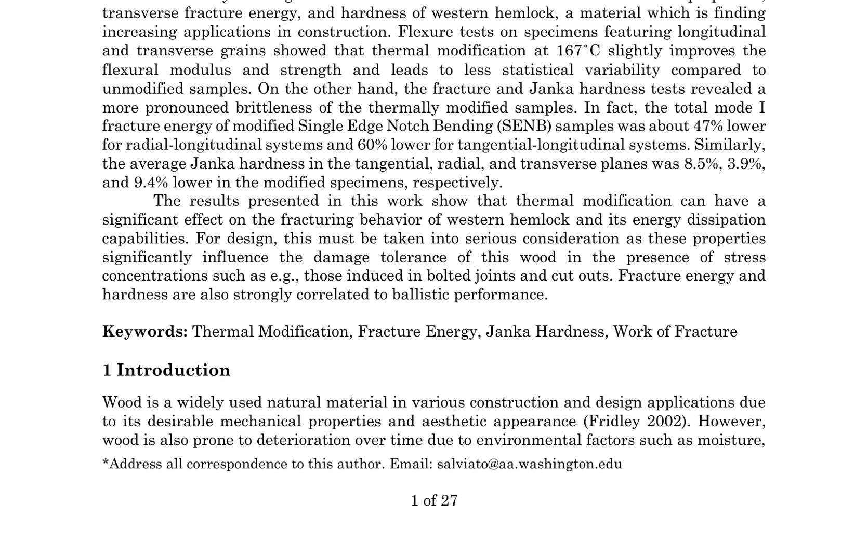Thermal modification of wood, a process that subjects wood to high temperatures in the absence of oxygen, has emerged as a promising method for enhancing wood durability and resistance to decay.

This treatment alters the chemical and physical structure of wood, leading to improvements in properties such as dimensional stability and microbial resistance. Research has extensively investigated the effects of thermal modification on wood mechanical properties, yielding varied results depending on factors like wood species, temperature, and duration of treatment.

For instance, thermally modified beech wood exhibits increased dimensional stability, hardness, and decay resistance, while thermally modified spruce wood shows improved dimensional stability and resistance to fungal decay.

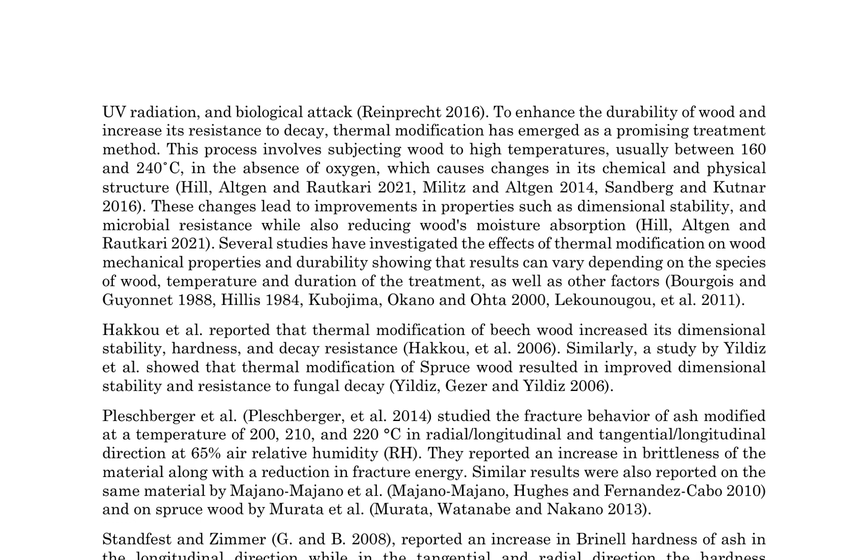Studies have also examined the fracture behavior of thermally modified ash, revealing an increase in brittleness and a reduction in fracture energy. Similarly, investigations on ash and spruce wood have observed increased Brinell hardness in the longitudinal direction, although some studies have reported a decrease in hardness in all principal anatomical directions after heat treatment at 200 degrees Celsius.

Moreover, thermal treatment has been found to maintain the intrinsic anisotropy of wood mechanical properties, leading to improved strength and elasticity in wet wood compared to untreated and treated samples.

However, significant decreases in modulus of elasticity, modulus of rupture, compression strength parallel to the grain, and Brinell hardness have been observed in certain wood species, such as Mozambican Brachystegia spiciformis and Julbernardia globiflora.

Heat treatment has also been applied to softwoods, including radiata pine, Scots pine, and Norway spruce, resulting in a large decrease in tensile strength parallel to the grain, an increase in compressive strength parallel to the fibers, and a significant reduction in impact strength.

These findings collectively highlight the complex effects of thermal modification on wood mechanical properties, emphasizing the need for further research to fully understand its implications.

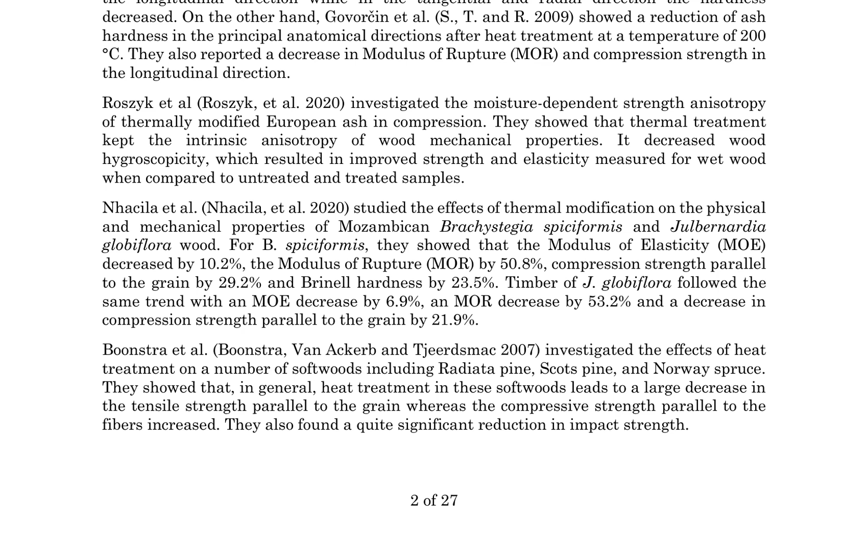The thermal modification of Western hemlock has received limited attention, particularly regarding its fracture energy and hardness, which are crucial indicators of its damage tolerance and ballistic performance.

A recent study by Nourian and Avramidis, 2021, examined the effects of commercial thermal modification on Western hemlock, assessing properties such as basic density, hygroscopicity, water absorption, anti-swelling efficiency, color change, Janka hardness, and dynamic modulus of elasticity.

Although their results showed decreased basic density, hygroscopicity, and water absorption, as well as increased dimensional stability, thermal treatment had no significant effect on mechanical behavior.

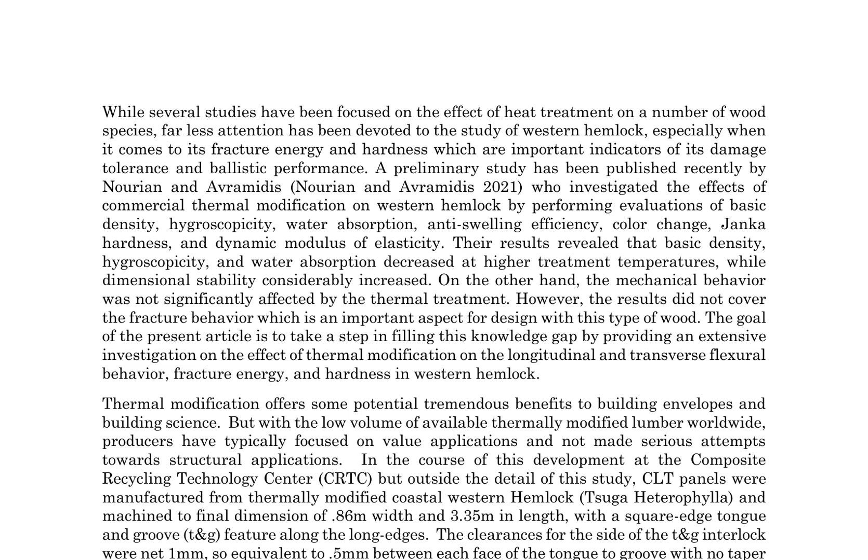Notably, this study did not investigate fracture behavior, a critical aspect for design with this type of wood. This knowledge gap is addressed in the present study, which provides an in-depth investigation of the impact of thermal modification on longitudinal and transverse flexural behavior, fracture energy, and hardness in Western hemlock.

The study's findings aim to overcome the limited volume availability of thermally modified Western hemlock, which has restricted its application to value-added products rather than structural applications.

A recent development at the Composite Recycling Technology Center demonstrated the feasibility of thermally modified Western hemlock in building science applications. CLT panels were manufactured from thermally modified coastal Western hemlock and machined to precise dimensions.

Following indoor storage for 6 to 9 months, the panels exhibited dimensional stability, allowing for precise assembly without interference or coercion. This capability enables a tight and durable building envelope seal, as well as a consistent glue line thickness and higher performance assembly.

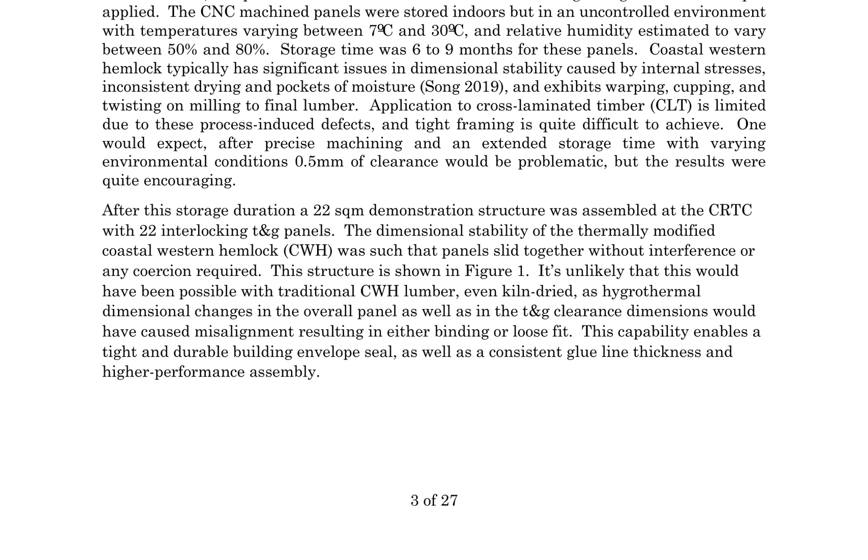The successful demonstration is depicted in Figure 1, showing the assembled 22 square meter demonstration structure at the CRTC. This research focuses on the mechanical behavior of thermally modified Western coastal hemlock (CWH) and its implications for structural design standards and computational models.

The study presents a demonstration structure featuring thermally modified CWH cross-laminated timber (CLT) panels with a tight 1 mm clearance between the side faces of the tongue and groove (T&G) joint to ensure precise panel alignment.

The findings provide useful design guidelines for accounting for the effects of thermal modification on the mechanical behavior of CWH and contribute to the development of rich databases for calibrating and validating computational design tools.

The research seeks to integrate thermally modified, undervalued US-based wood species into structural design standards and computational models, focusing on Western coastal hemlock. Advances in understanding the mechanical behavior of thermally modified wood would positively impact its use in mass timber elements like CLT. The study's findings are expected to provide a reference for incorporating thermally modified wood into structural design standards and computational models.

The materials used in this study were acquired from a small harvest of coastal Western hemlock from the Makah Reservation in Washington state. The forest is designated as a Site Class 3, low elevation, and moderate climate. The sample material was prepared according to specific guidelines, with details on the preparation process provided in the subsequent sections.

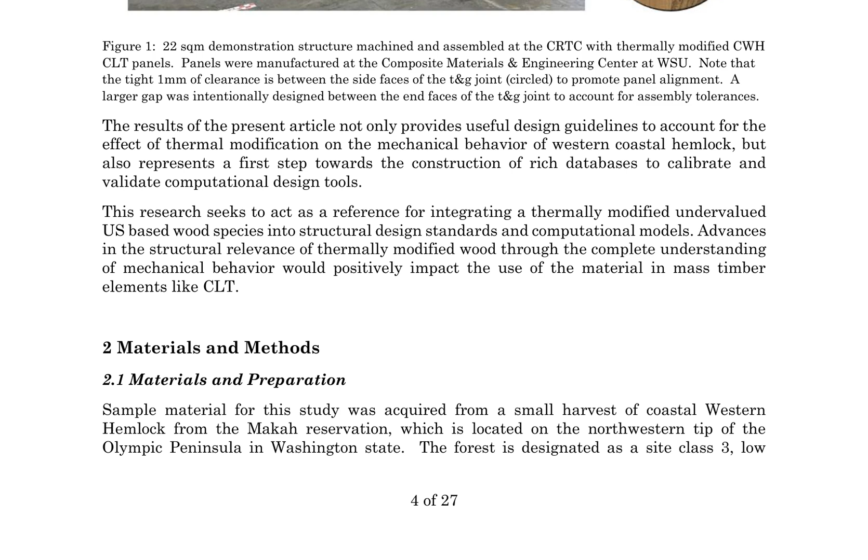The study's focus on Western coastal hemlock is significant, as this species is undervalued and underutilized in the U.S. By investigating its mechanical behavior and developing design guidelines, this research aims to promote the use of thermally modified CWH in structural applications, contributing to a more sustainable and efficient use of forest resources.

A 55.88 cm diameter, 396 cm log of Western hemlock was obtained from a commercial timber harvest program in the Pacific Northwest region, characterized by a climate with significant winter rainfall and a mean annual precipitation of 203.2 to 304.8 cm. To meet testing needs, the log was milled into various board sizes using a Weyerhaeuser mobile sawmill.

For longitudinal and transverse bending specimens, as well as single-edge notch bend (SENB) specimens, 23.175 x 40.64 x 396 cm boards were cut tangentially from the middle section of the log's radius. A 6.35 x 18 x 396 cm board was also cut near the pith for Janka hardness samples.

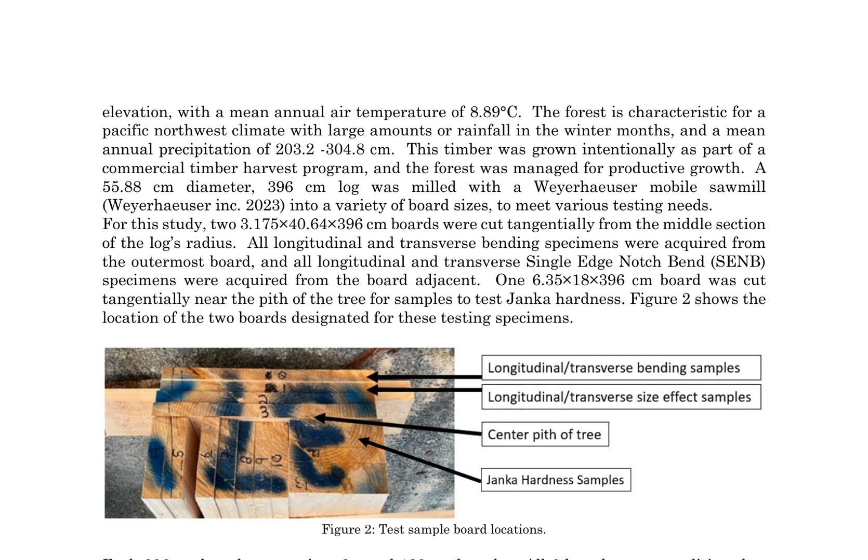Each 396 cm board was divided into 3 equal 132 cm lengths and conditioned at approximately 21.11 degrees Celsius and 65% relative humidity for 2 weeks.

Subsequently, the boards underwent an accelerated drying regime in a Wisconsin oven for up to 4 days, with temperatures not exceeding 48.89 degrees Celsius. Daily moisture content measurements were taken on a freshly planed surface with an Orion 930 moisture meter, and boards were removed from the drying regime when their moisture content dropped below 13%.

Minimal cracking and shrinkage effects were observed, allowing for the production of straight, crack-free samples. The boards were then split into 2 groups: unmodified samples, which remained at ambient conditions, and thermally modified (TM) samples, which underwent a standard production cycle at Therma Wood Technologies.

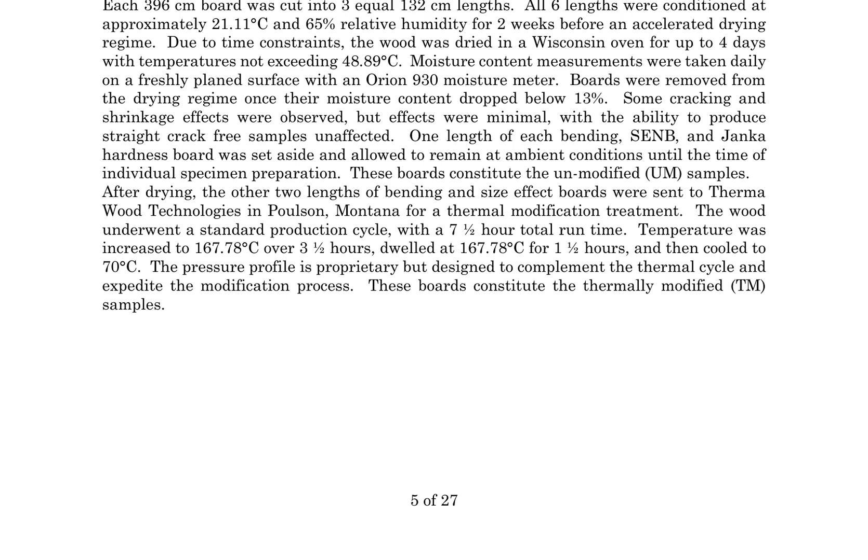The thermal modification treatment involved a 7.5 hour total run time, with a temperature increase to 167.78 degrees Celsius over 3.5 hours, a 1.5 hour dwell at 167.78 degrees Celsius, and subsequent cooling to 70 degrees Celsius. A proprietary pressure profile complemented the thermal cycle to expedite the modification process.

This section of the research paper delves into the preparation of specimens for various tests, including longitudinal and transverse bending specimens, as well as single-edge notch bending (SENB) specimens.

The preparation process began with planing boards down to a thickness of 25 mm using a grizzly planer, followed by ripping them on a SawStop table saw to create 25 x 25 x 410 mm longitudinal specimens parallel to the grain. These samples were then run back through the planer at 25 mm to reduce dimensional variability from the table saw before being cut to length on a DeWalt miter saw.

Transverse specimens were also prepared by ripping them perpendicular to the grain, spanning the entire width of the board. A total of 25 specimens were produced for each grain orientation.

The paper also presents the grain structure of both untreated and thermally modified (TM) wood in longitudinal bending specimens, as shown in Figure 3, with the loading direction down from the top of the image. This figure highlights the differences in grain structure between untreated and TM wood, which could potentially impact their mechanical properties and behavior under various loading conditions.

In addition to bending specimens, the paper describes the preparation of SENB specimens for fracture testing. These specimens were prepared in a similar fashion to bending specimens, with precise dimensions achieved using the planer whenever possible. The use of SENB specimens allows researchers to investigate the fracture behavior of the wood under different grain orientations and loading conditions, providing valuable insights into its mechanical properties and potential applications.

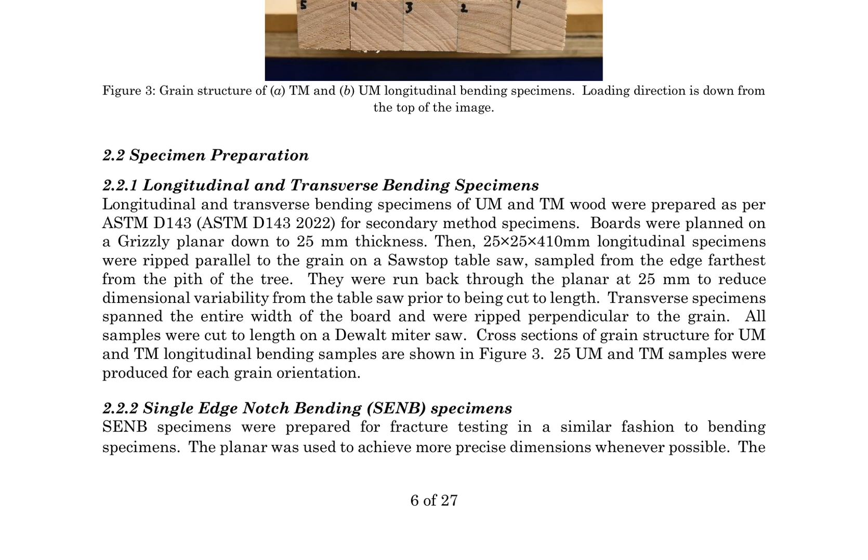This study examines the fracture behavior of wood samples using the single-edge notch bending (SENB) test, focusing on the radial-longitudinal (RL) and tangential-longitudinal (TL) configurations.

To create a finite width edge notch, a small kerf blade hand saw was employed, ensuring the crack tip radius is smaller than Irwin's characteristic length to avoid affecting fracture behavior.

The SENB test configurations, illustrated in Figure 4, comprise the RL system, where the crack propagates parallel to the grain in plane LT, and the TL system, where the crack propagates parallel to the grain in plane RL.

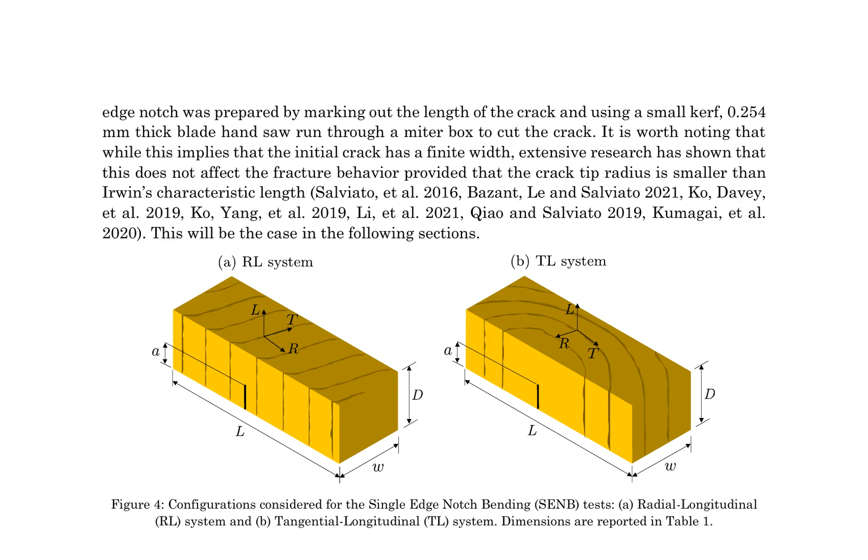The dimensions of the SENB specimens for both configurations are presented in Table 1, with 2 sizes tested for the RL system and 1 size for the TL system. 8 samples were produced for each size and configuration to ensure reliable results.

Previous research on spruce woods has shown that the RL system typically exhibits larger fracture energies and fracture process zones (FPZs) compared to the TL system.

To account for potential size effects, 2 sizes of the RL system were tested, as this system is more prone to size effects, allowing for the measurement of size-independent fracture energy and ensuring the FPZ is fully developed.

The testing of both configurations is necessary due to differences in mesostructure in front of the crack tip, resulting in disparate fracture energies. By investigating both configurations, this study aims to provide a comprehensive understanding of the fracture behavior of wood samples, encompassing the effects of configuration and size on fracture energy and FPZ.

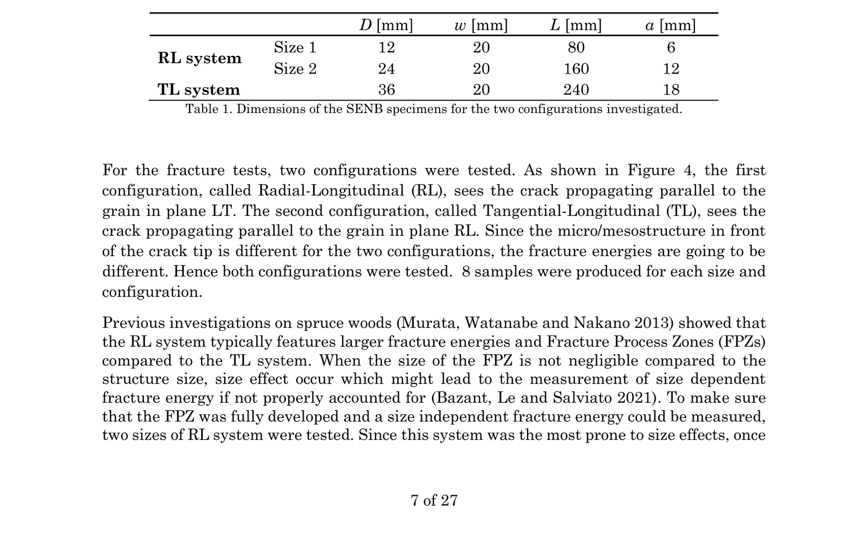The experimental setup and methodology employed in this investigation involved testing a single size of the TL system, as the measured fracture energy was found to be unaffected by size.

A comprehensive summary of all specimen sizes is presented in Table 1, with a schematic representation of the configurations examined in Figure 4. Dimension and weight measurements were obtained, and samples were speckled for digital image correlation analysis.

For Janka hardness testing, 20 specimens each of untreated and TM wood were prepared from the same log, with dimensions of 50.8 x 50.8 x 27 mm.

Figure 5 displays the specimens, illustrating similar annual growth ring patterns and exhibiting 7-8 rings with distinct earlywood and latewood bands. Prior to testing, the densities of the specimens were obtained at equilibrium moisture content (EMC), with average moisture content values of 12.5% for untreated wood and 9% for TM wood.

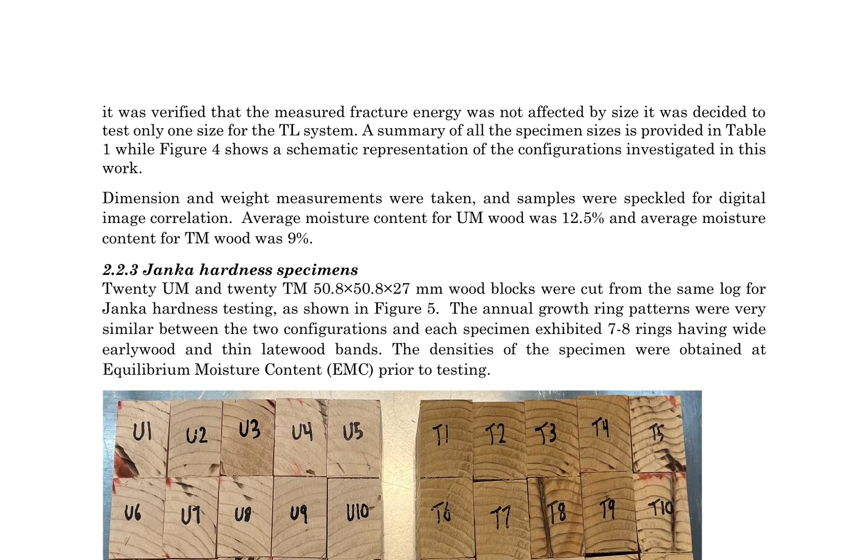Flexure and single-edge notch bending (SENB) tests were performed on a Test Resources 316 series UTM, utilizing a 22 kN load cell with a 10 Hz sampling rate. The typical test setup is shown in Figure 6. A displacement rate of 5.08 mm per minute was employed during testing.

Digital image correlation (DIC) analysis was facilitated through a thin coat of spray paint primer and a fine random distribution of black speckles. Images were captured with a Nikon D5600 DSLR camera and Nikon lens, with a sampling rate of 1 Hz. DIC analysis enabled the characterization of the whole strain field and strain redistributions at damage locations, as well as the estimation of the compliance of the fixture and the machine.

This experimental setup allowed for a thorough investigation of the mechanical properties of untreated and TM wood specimens.

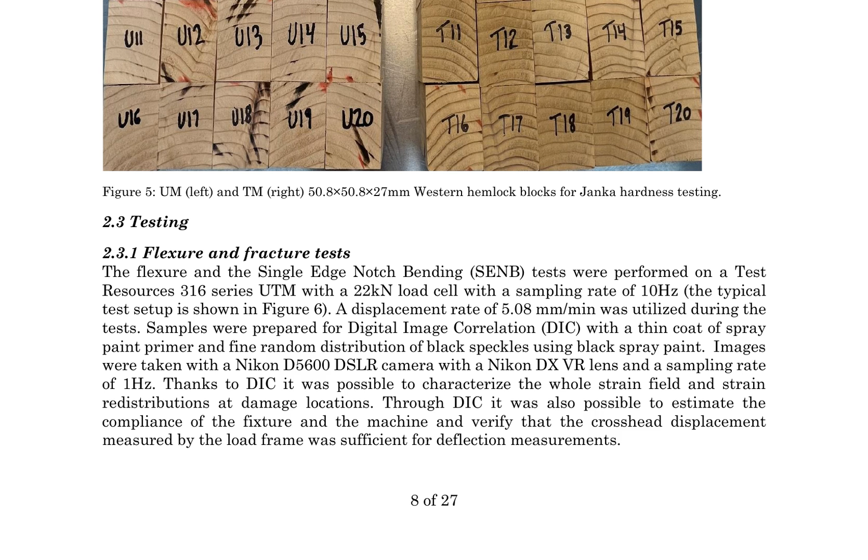The combination of Janka hardness testing and flexure SENB tests, coupled with DIC analysis, provided a comprehensive understanding of the specimen's behavior under various loading conditions. The experimental results are expected to shed light on the differences between untreated and TM wood, ultimately contributing to the development of novel engineered wood products.

The experimental setup for evaluating the material's resistance to crack growth and propagation, as well as its flexural properties, involved single-edge notched bend (SENB), and longitudinal, transverse bending tests. Figure 6 illustrates the test configurations, utilizing 10 mm and 30 mm rollers for SENB and bending tests, respectively.

Scanning electron microscopy (SEM) imaging was performed on radial-longitudinal (RL) and tangential-longitudinal (TL) specimens from each configuration to examine the fracture surface morphology. A Phantom Pro X SEM was employed, operating at 15 kV and 60 pascals. To ensure accurate imaging, razor-cut sections of the fractured surface were prepared, and images were captured 5-15 mm away from the crack tip and at least 1 mm away from the edges to avoid damage from sample preparation.

Complementing the fracture tests, Janka hardness tests were conducted using a custom-machined indenter conforming to ASTM D143 standards. The indenter design and fixture setup are depicted in Figures 7 and 8. The indenter was attached to a United SFM 300kN electromechanical series universal testing machine to collect data.

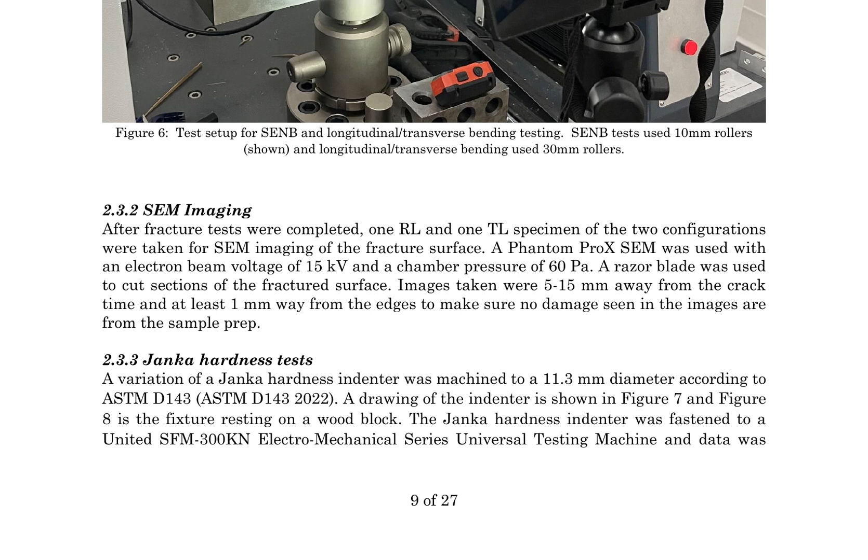The experiment measures the Janka hardness of wood specimens using a custom-built fixture and United Datum 5i software. Specimens are loaded at 6.35 mm per minute to a maximum penetration depth of 5.65 mm, which is half the diameter of the fixture.

For each of the 40 specimens, 6 hardness values are obtained from 3 orthogonal faces: 2 from the tangential face, 2 from the radial face, and 2 from the transverse face or cross-section of the wood. Average values are calculated for each face of each sample and ultimately for each face of the 2 configurations.

The Janka hardness indenter, shown in Figure 7, is a machined component designed to penetrate the wood specimen. Figure 8 illustrates the indenter in action, sitting on top of the specimen, demonstrating the experimental setup.

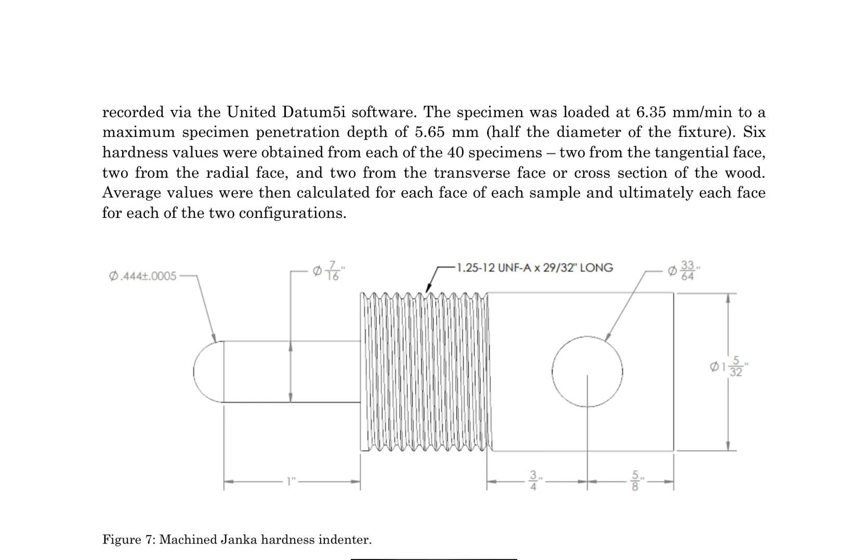The Janka hardness test is a standardized method for evaluating the hardness of wood, a crucial property in determining its suitability for various applications. The experiment's design allows for the collection of comprehensive data on the Janka hardness of the wood specimens, taking into account the variability in hardness across different faces and configurations.

By leveraging the United Datum 5i software, researchers can accurately record and analyze the data, providing a robust understanding of the wood's mechanical properties. The experimental protocol ensures that the results are reliable and reproducible, which is essential for drawing meaningful conclusions about the Janka hardness of the wood specimens.

The data collected from this experiment will be crucial in informing the development of predictive models and understanding the relationships between wood properties and their corresponding hardness values.

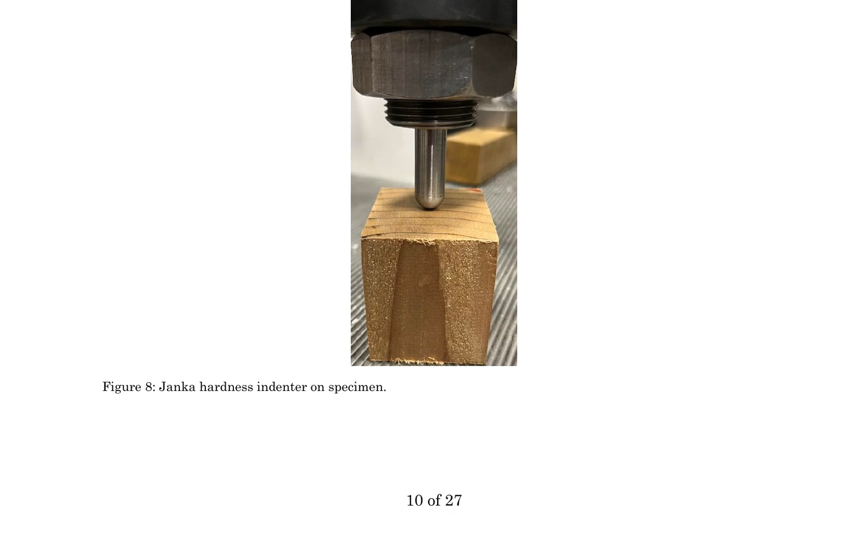Longitudinal and transverse bending tests were conducted to investigate the failure modes and mechanical properties of unmodified and thermally modified wood samples. The longitudinal bending samples exhibited various tensile failures, including simple and splintering tension, as well as cross-grain failures, in accordance with the ASTM D143 standard.

In contrast, the thermally modified longitudinal bending samples failed in a similar manner but with notable differences in failure behavior, characterized by quicker, more brittle behavior, with less crushing at the loading head and less deformation prior to ultimate failure. The fracture surfaces of the longitudinal flexure specimens, shown in Figure 9, illustrate typical fracture paths that follow the grain of the specimen.

In contrast, transverse bending samples exhibited brittle, fragile failures, with sudden and complete cleavage through the cross-section. The fracture surface was smooth, running along the grain, with no visible or audible cracking prior to ultimate failure.

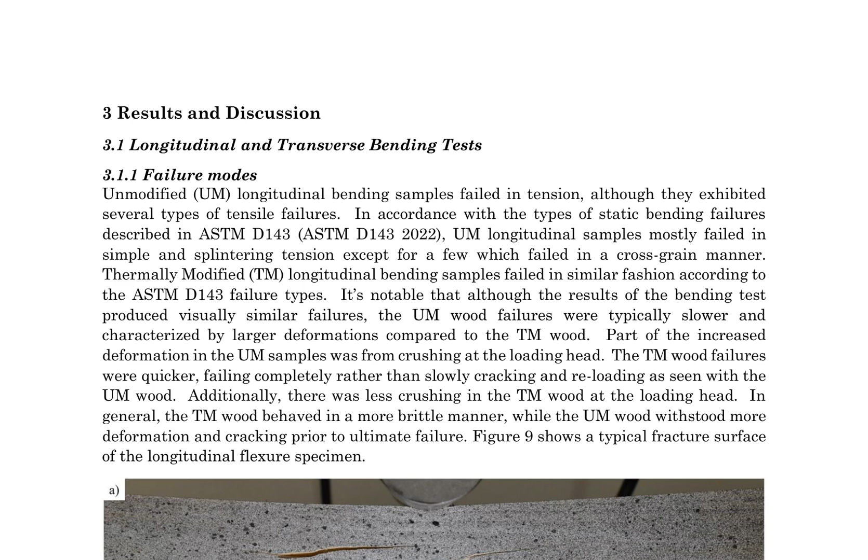Mechanical properties were evaluated through the calculation of modulus of rupture values, based on the maximum load measured in the tests. Bending strain and modulus of elasticity were calculated based on crosshead displacement of the load frame during the elastic response of the wood prior to any crushing or non-elastic behavior.

The results, presented in Table 2, show that the modified wood yielded 7% higher values compared to the unmodified wood, as illustrated in Figure 10a. The coefficient of variation (COV) values are also presented in Table 2.

The results suggest that thermal modification affects the mechanical properties of wood, particularly in terms of brittleness and deformation behavior. Thermally modified wood exhibits more brittle behavior, with quicker failures and less deformation prior to ultimate failure, whereas unmodified wood withstood more deformation and cracking prior to failure.

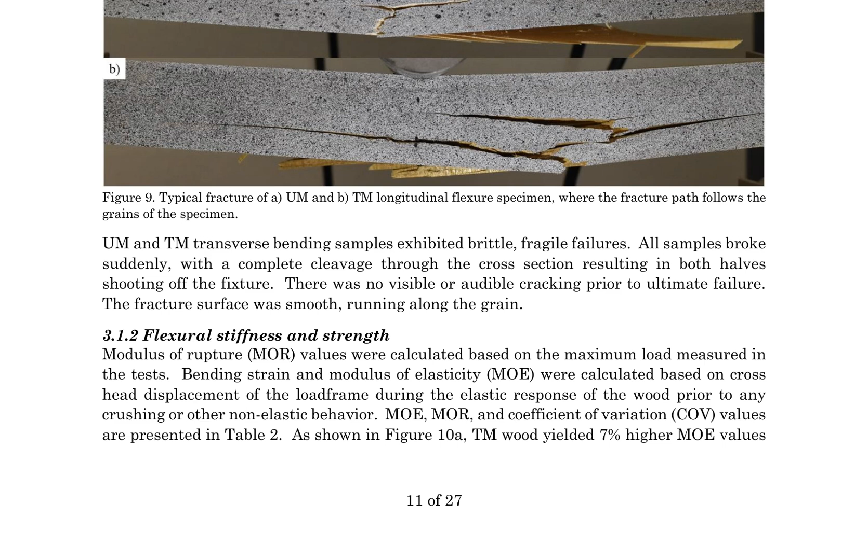These findings are consistent with visual observations of fracture surfaces and mechanical property calculations. The use of the ASTM D143 standard provides a framework for understanding the types of failures that occur in static bending tests, while the calculation of MOR, MOE and COV values provides a quantitative evaluation of the mechanical properties of the wood samples, highlighting the effects of thermal modification on the wood's behavior under bending loads.

The modulus of elasticity, MOE, values for TM and UM wood were found to be 24% and 32% lower, respectively, compared to the values reported in the Wood Handbook for Western hemlock. However, MOR values were 8% and 4% higher for TM and UM wood, respectively, compared to the Wood Handbook values.

These variations are attributed to differences in grain structures, density, faster tree growth, and other forest characteristics present within the wood from the Makah Reservation.

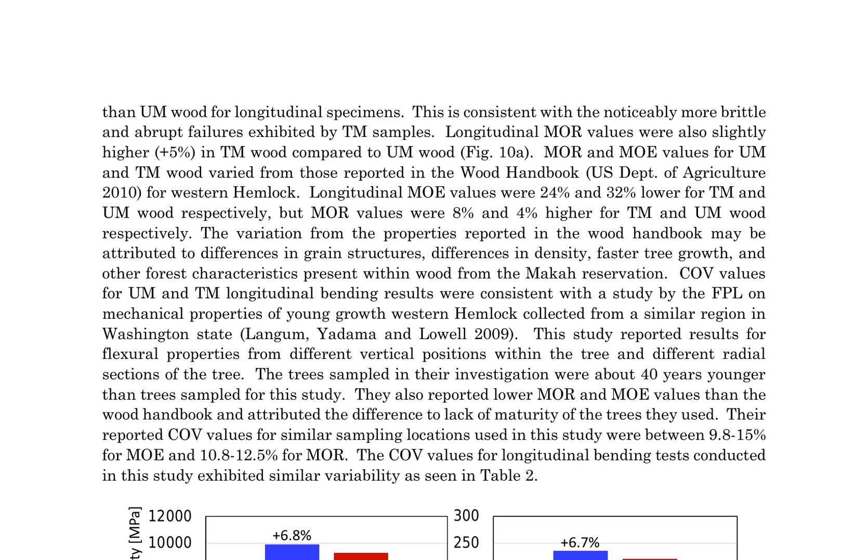Coefficient of variation, COV, values for MOR and MOE longitudinal bending results were consistent with a study by the Forest Products Laboratory, FPL, on mechanical properties of young-growth western hemlock collected from a similar region in Washington state. This study reported lower MOR and MOE values, attributed to the lack of maturity of the trees used.

COV values between 9.8 to 15% for MOE and 10.8 to 12.5% for MOR, similar to the results obtained in this study.

Longitudinal and transverse bending test results, including MOR, MOE, and COV values for TM and UM wood, as well as Wood Handbook values for Western hemlock, are presented in Table 2.

Notably, transverse bending test results showed more variation and lower strength, with values below the capacity of the load cell, adding uncertainty to the results.

Results for transverse bending, Table 2, indicated higher transverse strength for UM wood and slightly lower transverse stiffness.

The study's findings highlight the impact of thermal modification on the mechanical properties of wood, particularly in the longitudinal direction, and emphasize the importance of considering regional forest characteristics and tree growth patterns when evaluating wood properties.

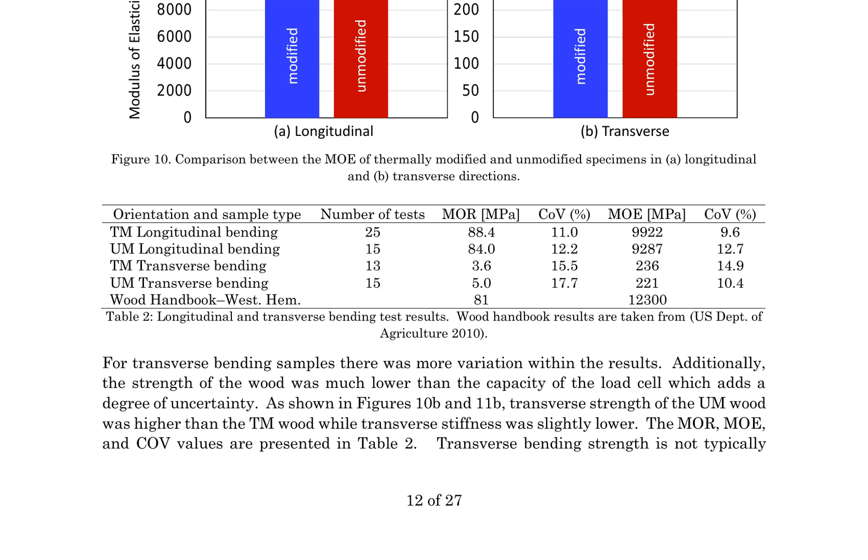This study delves into the mechanical properties of thermally modified and unmodified wood, focusing on the modulus of rupture, MOR, in both longitudinal and transverse directions.

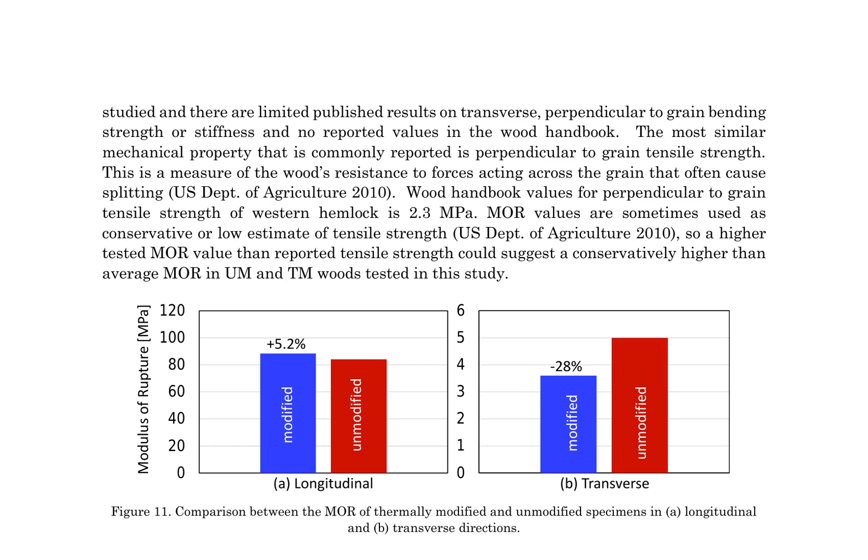Fracture tests were conducted using single-edge notch bending, SENB, specimens to characterize the fracture energy of the material, particularly in the transverse direction. Two configurations were tested: radial-longitudinal, RL, and tangential-longitudinal, TL, as these orientations can lead to different mesostructures and damage mechanisms in the fracture process zone, FPZ, resulting in varying energy dissipation.

The thermal modification may affect different microstructural features differently, making it crucial to analyze the fracture energy in both configurations. Most specimens exhibited stable crack propagation due to their high fracture energy and low stiffness in the transverse direction, preventing snapback instability.

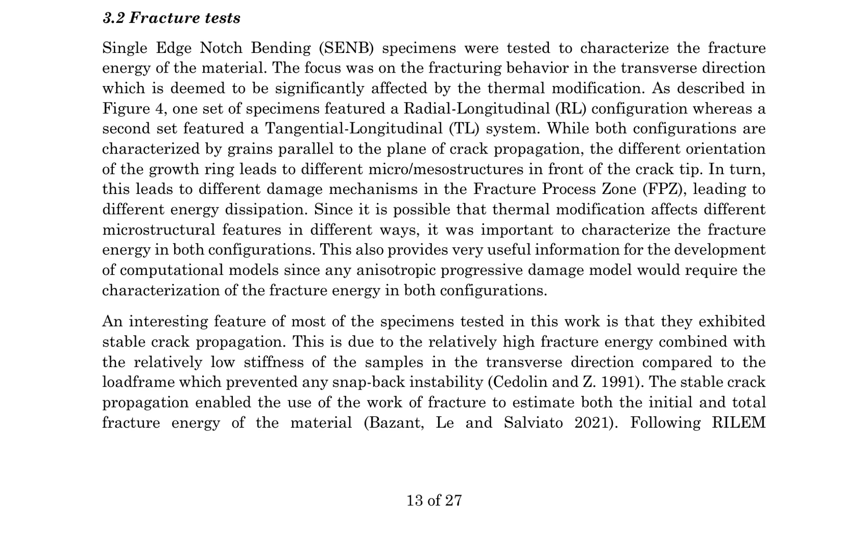This allowed for the estimation of both initial and total fracture energy using the work of fracture method, Bazant and Salviato 2021. The findings from this research contribute to the development of computational models, especially those incorporating anisotropic progressive damage models that require fracture energy characterization in both configurations.

Estimating fracture energy in quasibrittle materials, such as wood, is a complex task. The authors employ the RILEM recommended approach, dividing the work of fracture by the ligament area, to calculate the fracture energy, GF.

This is expressed by equation 1, where D-a represents the ligament length, W is the specimen width, M is the total sample mass, delta is the vertical displacement at the loading pin, and G is the acceleration of gravity. While this approach is an approximation, it overcomes difficulties associated with estimating fracture energy from the rate of elastic potential or using the J-integral.

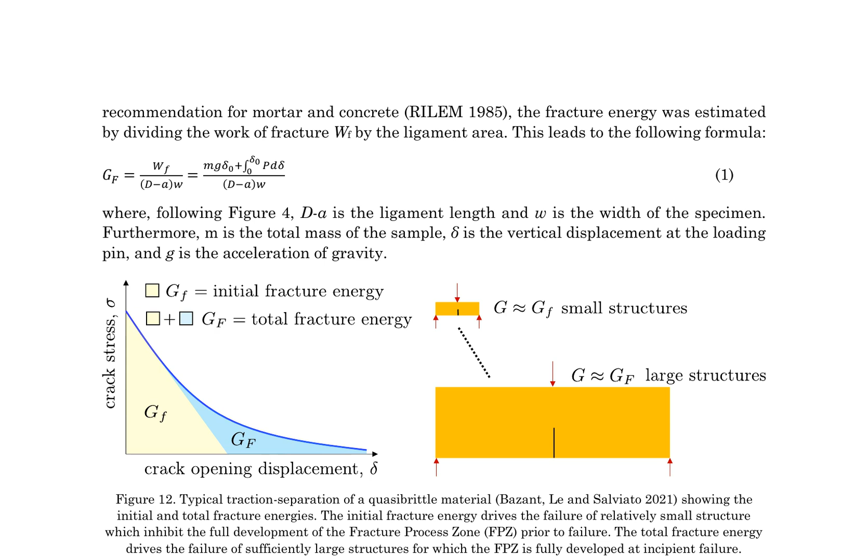The primary source of error lies in the difference in energy required to create a crack near the notch tip versus during stationary propagation. In wood samples, estimating fracture energy is further complicated by the challenge of guaranteeing a consistent grain orientation throughout the sample.

Assuming a uniform orientation would lead to significant errors in calculating the energy release rate. In contrast, the work of fracture approach only requires measuring the vertical load and vertical displacement.

The authors demonstrate the estimation of both initial fracture energy, Gf, and total fracture energy, GF, of the material. Initial fracture energy drives failure in small samples where the fracture process zone (FPZ) cannot fully develop, whereas total fracture energy represents the total energy dissipation per crack area down to complete failure.

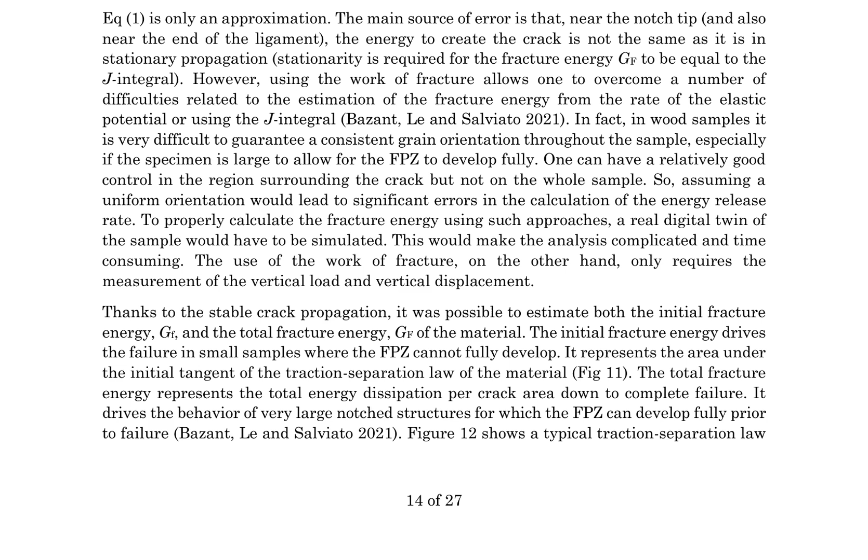A visual representation of the traction separation law of the material is provided, showcasing the initial and total fracture energies. The total fracture energy is emphasized as the driving force behind the behavior of very large notched structures, where the FPZ can develop fully prior to failure.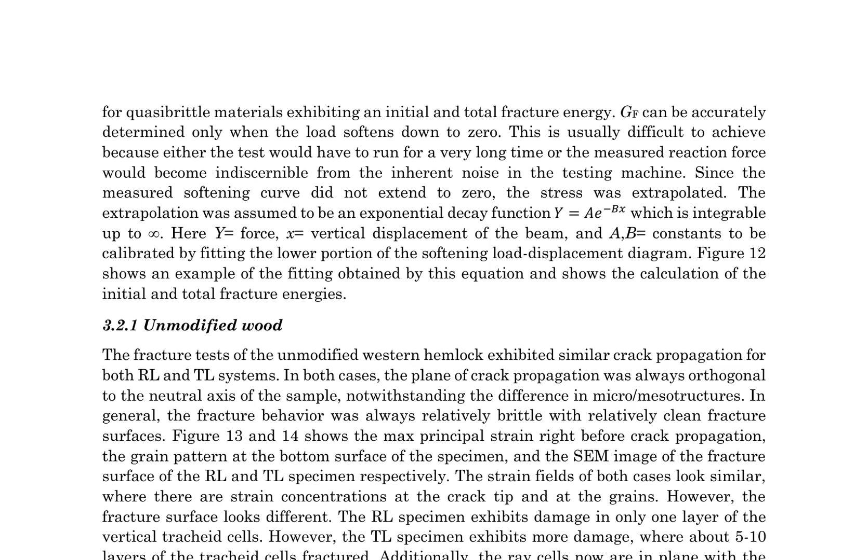In RL specimens, damage is confined to a single layer of vertical tracheid cells, whereas TL specimens exhibit damage across 5 to 10 layers of tracheid cells, leading to delamination and fracturing of ray cells. This difference in fracture behavior is attributed to the orientation of ray cells relative to the crack propagation direction.

In RL specimens, ray cells are perpendicular to the crack, resulting in fracturing of these cells. In contrast, ray cells in TL specimens are in plane with the crack propagation, causing delamination and fracturing of the ray cells. The calculation of initial and total fracture energies was performed using an exponential decay function to extrapolate the stress beyond the measured softening curve.

This method allows for accurate determination of the fracture energy, even when the load does not soften down to zero. The use of this extrapolation technique is crucial for understanding the fracture behavior of quasibrittle materials like wood.

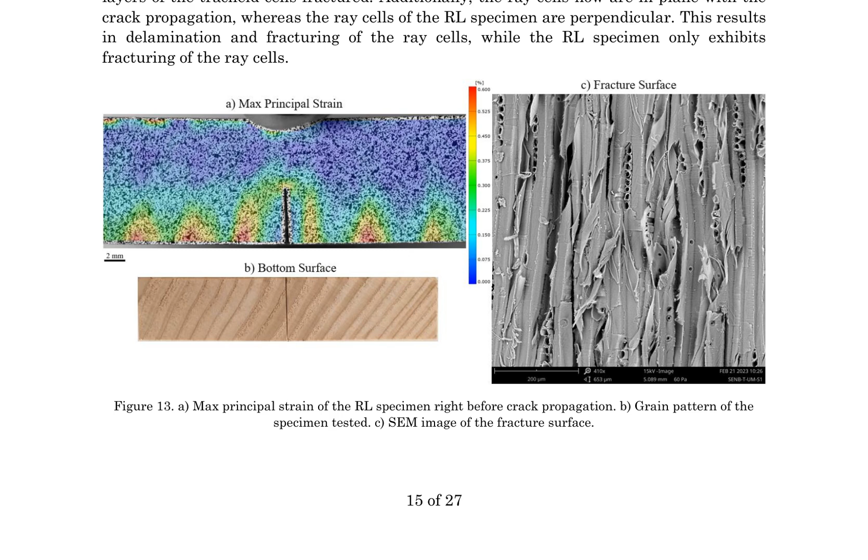The results highlight the importance of considering the orientation of ray cells in understanding the fracture behavior of wood. The findings also demonstrate the effectiveness of the exponential decay function in calculating fracture energies, which is essential for characterizing the fracture behavior of quasibrittle materials.

In the radial-longitudinal (RL) system, fracture tests were conducted on two distinct specimen sizes. The smaller size exhibited stable crack propagation with load softening, as evident in the load displacement curves, figure 15. These curves, adjusted for elastic displacement, were accurately fitted by the decay function, enabling the extrapolation of total fracture energy. This approach provided a reliable estimation of both Gf and GF for all tests.

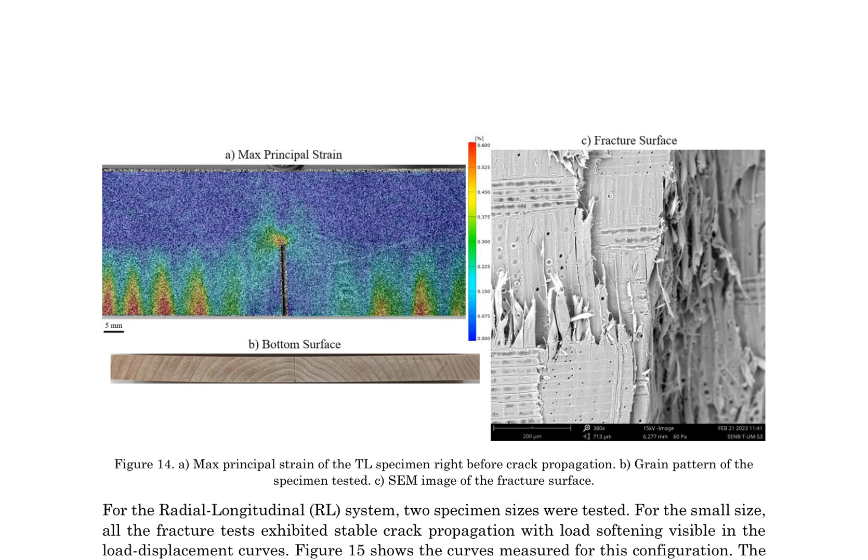In contrast, the larger size specimens displayed brittle behavior, characterized by snapback instability, precluding the calculation of fracture energy, figure 16. However, modified wood samples from the larger size yielded consistent fracture energy values with those from the smaller size. This suggests that a similar conclusion could be drawn for unmodified specimens, implying that the fracture process zone (FPZ) can develop adequately even at the smaller size. Consequently, size effects on fracture energy can be considered minimal in the experiments presented.

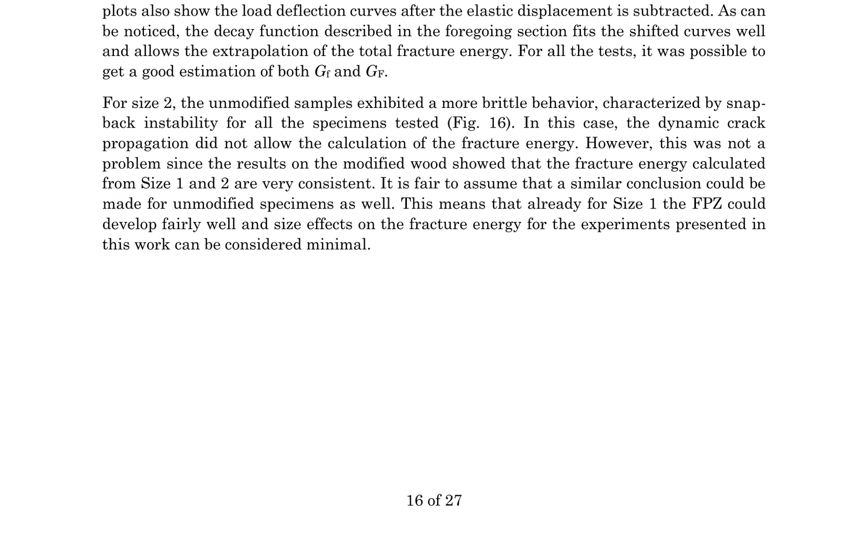Mechanical testing was conducted on unmodified samples of the RL system to examine load displacement behavior and calculate fracture energy. The results, presented in figures 15 and 16, display the load as a function of vertical displacement for size 1 and size 2 samples, respectively.

The load displacement curves for size 1 samples, shown in figure 15, exhibit a characteristic shape that allows for the calculation of initial fracture energy and total fracture energy using a fitted extrapolation function. The initial fracture energy is determined by extrapolating the load displacement curve to the point of initial crack propagation, while the total fracture energy is calculated as the area under the entire load displacement curve.

In contrast, the size 2 samples in figure 16 exhibited snapback instability with dynamic crack propagation, making it challenging to calculate the work of fracture. This phenomenon is attributed to the sudden release of stored energy during crack propagation, resulting in unstable crack growth.

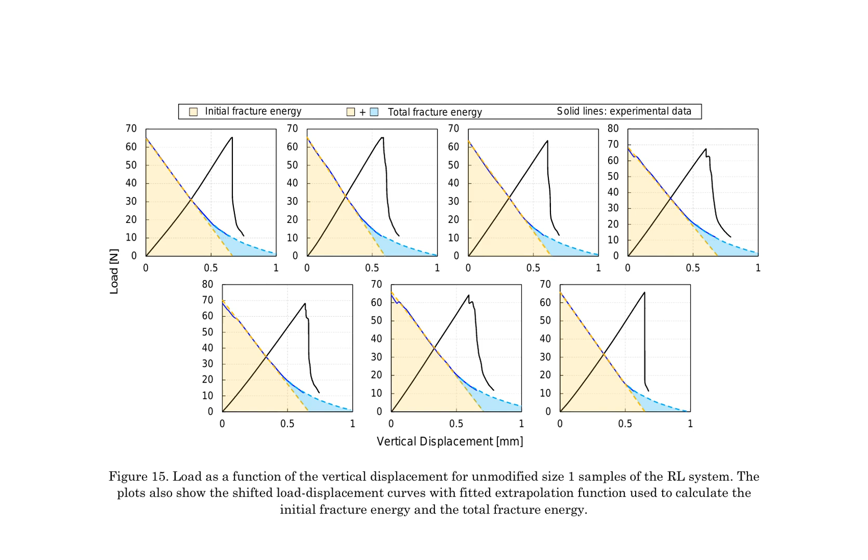The experimental data, presented as solid lines in both figures, provides valuable insights into the mechanical properties of the RL system. The vertical displacement is measured in millimeters, and the load is measured in newtons. The fitted extrapolation function estimates the initial fracture energy and total fracture energy, critical parameters in understanding the material's mechanical behavior. Notably, the results highlight the importance of considering sample size and material behavior in calculating fracture energy. The findings also underscore the need for careful experimental design and data analysis to accurately determine the material's mechanical properties.

Overall, the mechanical testing results provide critical information for understanding the RL system's mechanical properties, including fracture energy, and highlight the need for careful experimental design and data analysis to accurately determine these properties.

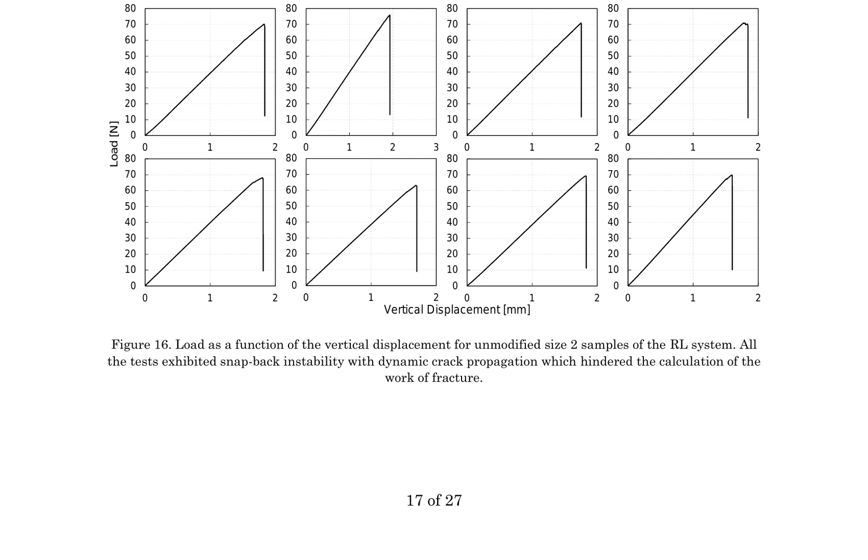The tangential-longitudinal (TL) system demonstrated stable crack propagation, despite being larger in size compared to the radial-longitudinal (RL) systems. However, the presence of knots reduced the number of valid tests, with 2 samples discarded due to knots located at the crack tip, which effectively blunted the crack and reduced the stress intensity, resulting in significantly larger loads at failure. A third sample with a knot away from the crack was also discarded, as the knot initiated a crack before the initial notch could start propagating.

Consistent fracture tests for the unmodified TL system are illustrated in Figure 17, showing the load as a function of vertical displacement. The plots also display the shifted load displacement curves with a fitted extrapolation function used to calculate the initial fracture energy, Gf, and total fracture energy, GF.

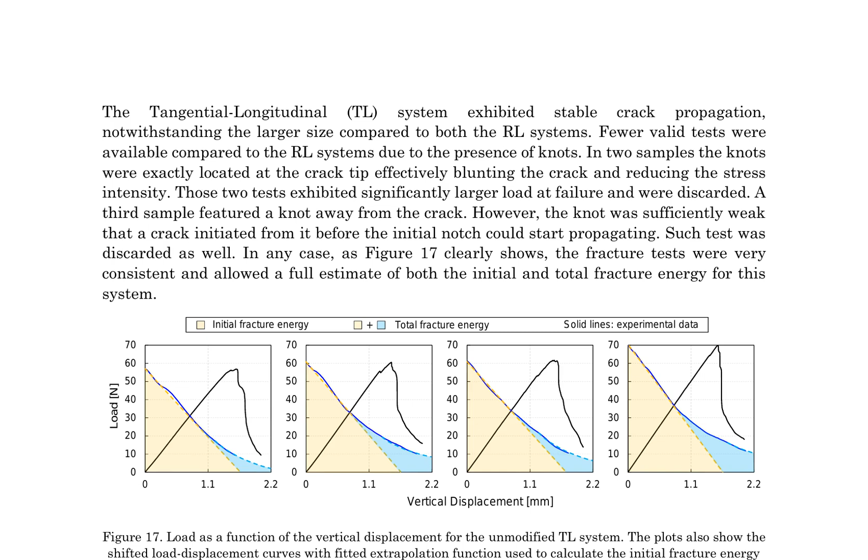Fracture tests on thermally modified Western hemlock wood exhibited similar behavior to unmodified wood, with both RL and TL systems showing brittle fracture behavior and clean fracture surfaces. The plane of crack propagation was orthogonal to the neutral axis of the sample, regardless of micro-mesostructural differences. The results indicate that the thermal modification process does not significantly alter the fracture behavior of the wood, as the RL and TL systems exhibit similar behavior to their unmodified counterparts.

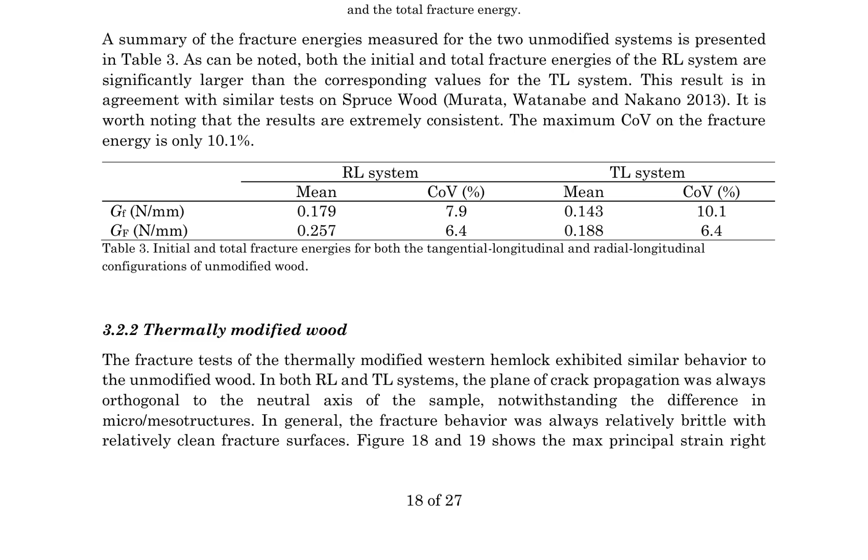In the context of wood fracture mechanics, a comparative analysis was conducted between radial-longitudinal (RL) and tangential-longitudinal (TL) wood specimens, focusing on their grain patterns and fracture surfaces. Digital image correlation (DIC) was employed to measure the strain fields preceding crack propagation. The resulting strain fields for both RL and TL specimens exhibited similar characteristics, with strain concentrations at the crack tip and grain boundaries. However, the fracture surfaces of the 2 specimens differed significantly.

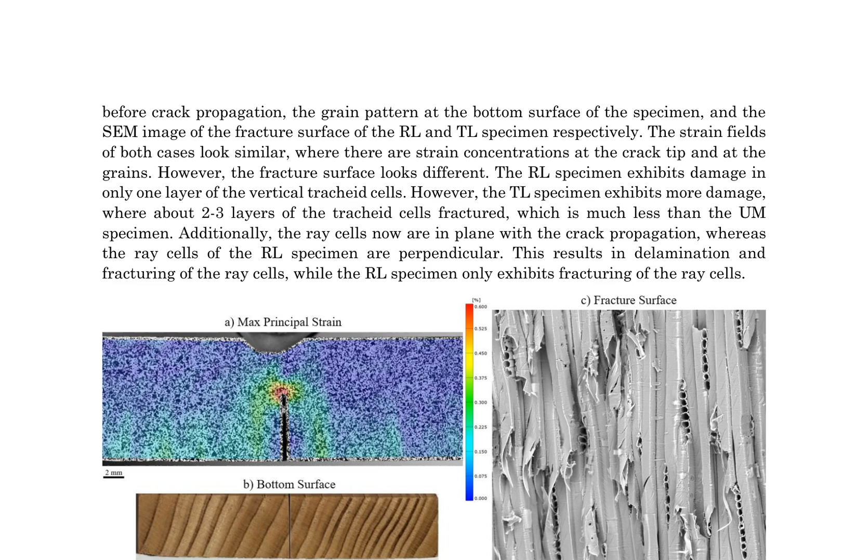The RL specimen displayed damage confined to a single layer of vertical tracheid cells, whereas the TL specimen exhibited more extensive damage across 2-3 layers of tracheid cells. Notably, the ray cells in the TL specimen were oriented in the plane of crack propagation, leading to delamination and fracturing of these cells. In contrast, the ray cells in the RL specimen were perpendicular to the crack propagation, resulting in only fracturing of the ray cells without delamination.

Figures 18 and 19 illustrate these differences visually, showcasing the maximum principal strain distribution, grain pattern, and SEM image of the fracture surface for both RL and TL specimens. These visual aids highlight the distinct fracture behaviors between the two types of wood specimens. The research findings contribute to understanding the role of grain orientation in determining the fracture behavior of wood, with implications for optimizing wood-based materials in various engineering applications.

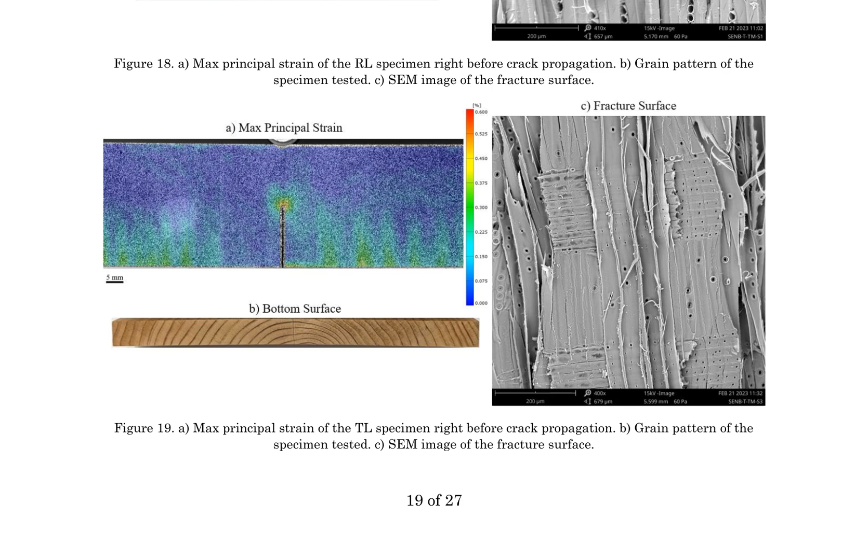The study's results suggest that grain orientation plays a crucial role in determining the fracture behavior of wood, with significant differences observed between RL and TL specimens. The findings of this research can inform the development of wood-based materials with improved mechanical properties, tailored to specific engineering applications.

Thermally modified wood exhibits distinct fracture behavior, particularly in the radial-longitudinal (RL) system. Researchers conducted fracture tests on two specimen sizes, observing stable crack propagation with load softening in all cases. Load displacement curves for small and large size samples are presented in figures 20 and 21, respectively, including shifted curves with fitted extrapolation functions for calculating initial and total fracture energies.

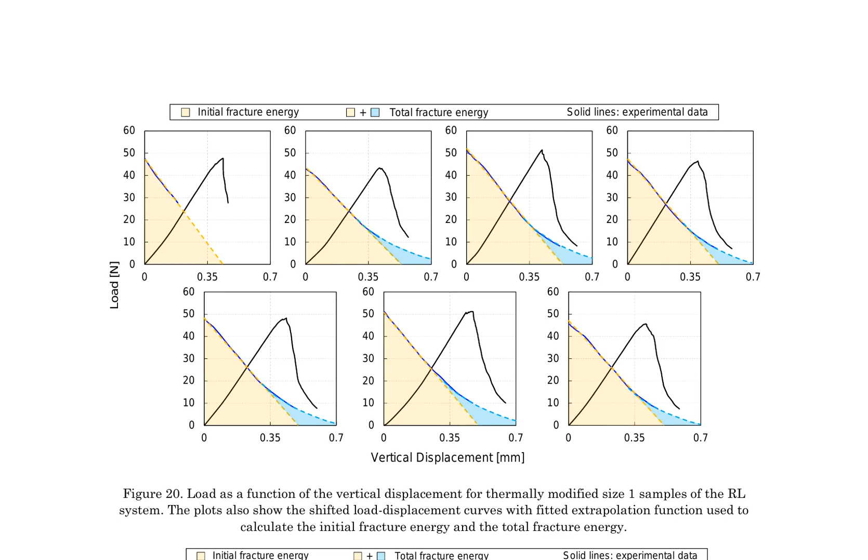The load displacement curves for small size samples, shown in figure 20, feature solid lines representing experimental data, illustrating the relationship between load and vertical displacement. Fitted extrapolation functions enable the calculation of initial fracture energy and total fracture energy. Similarly, large size samples' load displacement curves, presented in figure 21, include shifted curves and fitted extrapolation functions for determining fracture energies.

These measurements are crucial for assessing the mechanical properties of thermally modified wood under various conditions. By analyzing load displacement curves and calculating fracture energies, researchers can gain insights into crack propagation stability and material performance. The comparison between small and large size samples provides valuable information on the effect of specimen size on fracture behavior, which is essential for optimizing material design and application in engineering contexts.

The study highlights the significance of considering both initial and total fracture energies when evaluating thermally modified wood's performance. The research contributes to understanding the material's fracture mechanics, emphasizing the importance of fracture energy calculations in assessing mechanical properties. The findings have implications for the design and application of thermally modified wood in various engineering fields, where material performance and stability are critical.

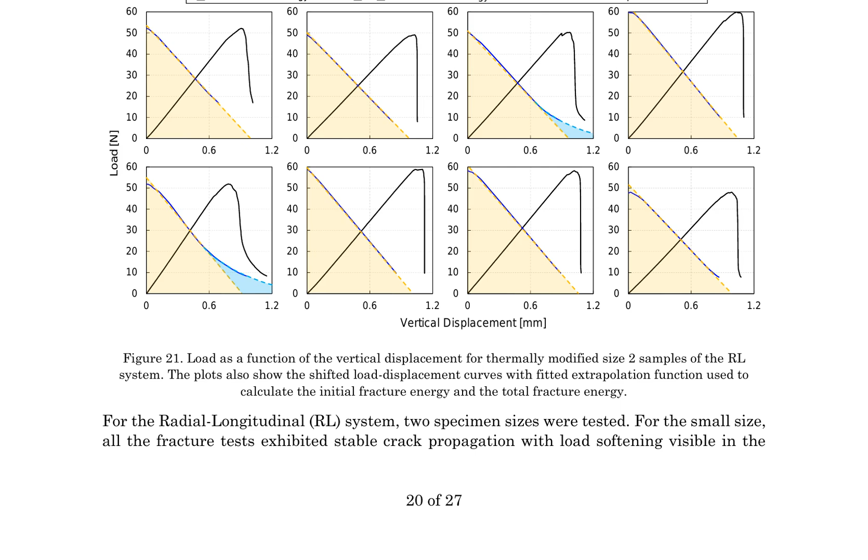Load displacement curves for thermally modified wood specimens exhibit distinct characteristics, with most tests allowing for the characterization of both total and initial fracture energies. Larger size specimens demonstrate relatively stable crack propagation, although only two tests enabled full characterization of total fracture energy.

In contrast, the tangential-longitudinal (TL) system exhibits stable crack propagation in all tests, with consistent load displacement curves facilitating accurate calculation of fracture energies. Figure 22 presents the load as a function of vertical displacement for the thermally modified TL system, showcasing shifted load displacement curves and fitted extrapolation functions used to calculate initial and total fracture energies.

Table 4 summarizes the fracture energies of thermally modified wood, revealing that the radial-longitudinal (RL) system exhibits a larger fracture energy compared to the TL system, consistent with unmodified wood. However, fracture energy values are significantly lower in thermally modified wood.

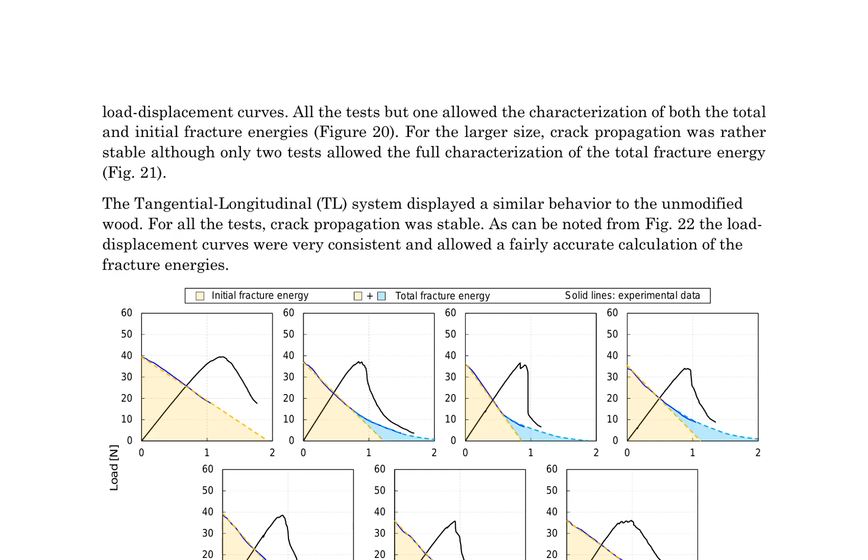Mean and coefficient of variation (COV) values for initial and total fracture energies are presented for both RL and TL systems. Load displacement curves in Figure 22 demonstrate a consistent trend, with shifted curves and fitted extrapolation functions facilitating calculation of initial and total fracture energies.

These results suggest that thermal modification affects wood's fracture behavior, with implications for material characterization and potential applications. Notably, the fracture energy values are lower in thermally modified wood, indicating a potential decrease in material toughness.

The data presented in Table 4 highlights the significance of considering both RL and TL systems when evaluating the fracture behavior of thermally modified wood. The differences in fracture energy values between the two systems underscore the importance of material orientation in determining the mechanical properties of thermally modified wood.

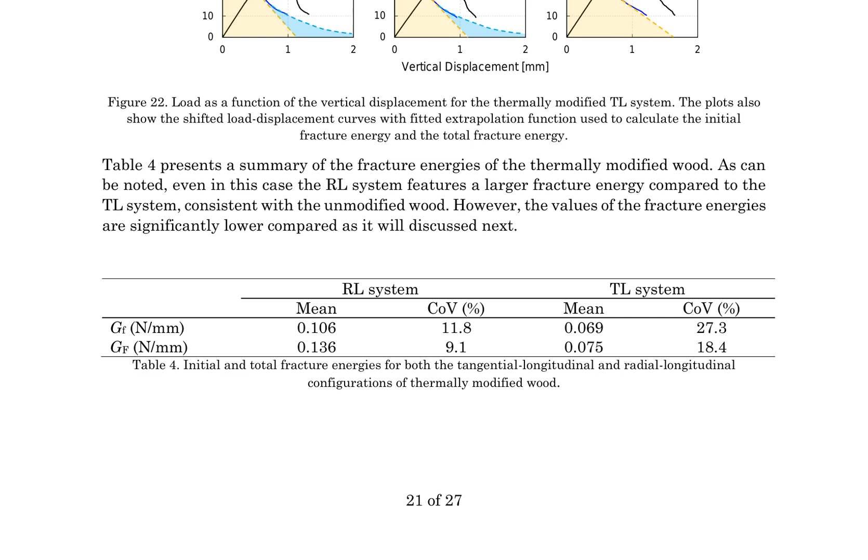Overall, the results of this study contribute to a deeper understanding of the effects of thermal modification on wood's fracture behavior, with important implications for material selection and design in various applications.

This section presents a comparative analysis of the initial and total fracture energies between thermally modified and unmodified wood, leveraging the precise calculations obtained in previous sections.

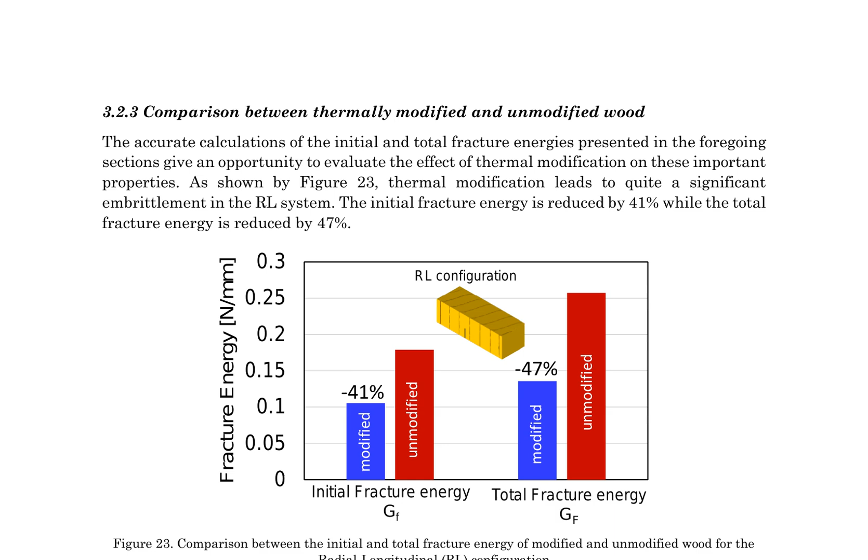The reduction in fracture energies is evident from the comparative plots in Figures 23 and 24, where the thermally modified wood specimens exhibit lower energy values than their unmodified counterparts. These findings imply that thermal modification compromises the wood's inherent fracture toughness, rendering it more susceptible to brittle failure.

By analyzing the changes in fracture energies between modified and unmodified wood, this study sheds light on the impact of thermal modification on the mechanical properties of wood. The results of this comparative analysis can inform the development of new wood-based materials and products, where fracture resistance is a critical design consideration.

The differences in fracture energies between the RL and TL systems highlight the anisotropic nature of wood and underscore the need for careful consideration of material orientation in design and application.

These results also provide a basis for future investigations into the mechanisms underlying the degradation of fracture properties in thermally modified wood, potentially informing strategies to mitigate or counteract this effect.

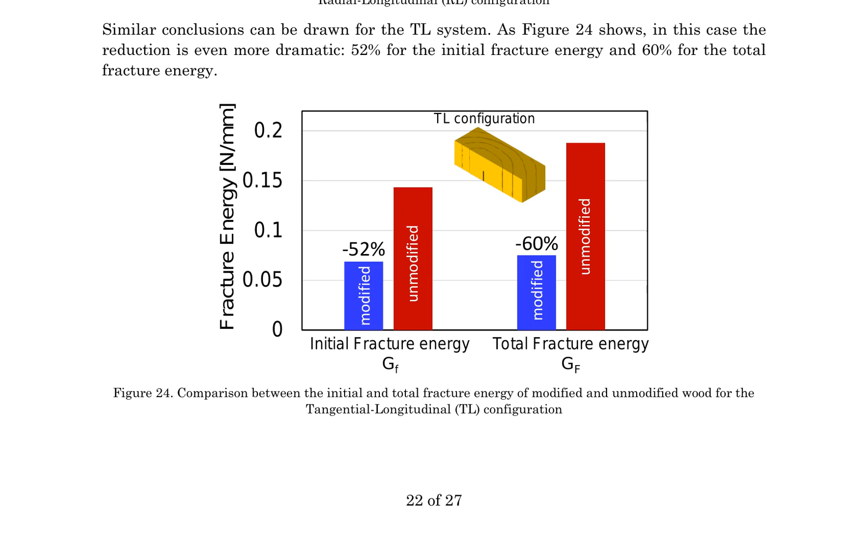The observed change in fracture energy of Western hemlock wood specimens can be attributed to several factors, including changes in moisture content, degree of polymerization, and degradation of hemicellulose.

Previous research on various wood species, cellulose nanocrystal films, and polymer composites has demonstrated that moisture content significantly affects mechanical properties, with water molecules acting as a plasticizer to increase energy absorption.

The degree of polymerization of cellulose has been shown to impact the strength of nanocellulose films, although this effect may be limited in wood due to species-dependent changes in degree of polymerization at low temperatures.

Thermal and chemical modification can also lead to degradation, primarily affecting the hemicellulose component, which compromises stress transfer between cells, resulting in decreased fracture energy.

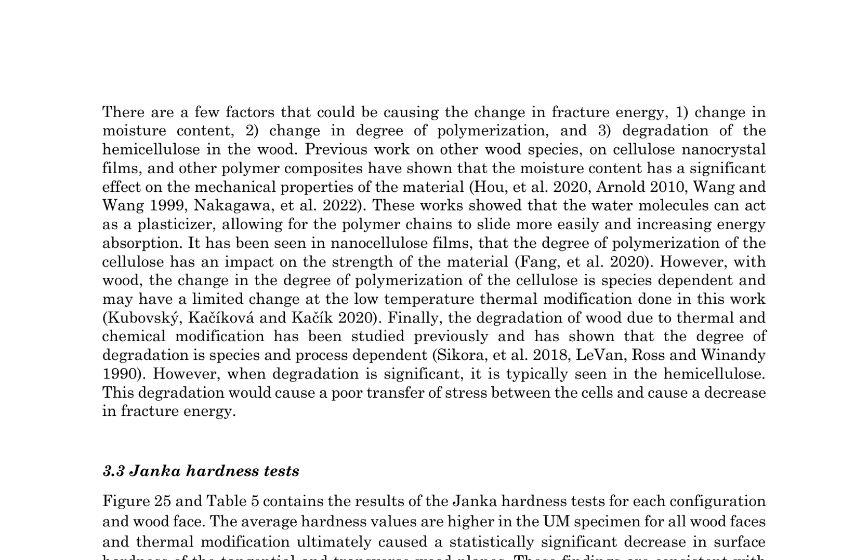Janka hardness tests indicate that average hardness values are higher in unmodified specimens for all wood faces. Thermal modification (TM) caused a statistically significant decrease in surface hardness of the tangential and transverse wood planes. These findings are consistent with previous research, which has shown that surface hardness generally decreases with thermal modification, especially at elevated temperatures. The results highlight the importance of considering the effect of thermal modification on Western hemlock hardness when designing with this wood species.

The equations governing the relationships between moisture content, degree of polymerization, and fracture energy are not explicitly stated in this section. However, the discussion implies that the degree of polymerization and moisture content are key factors influencing the mechanical properties of wood. The methodology employed in this study involved testing the Janka hardness of Western hemlock wood specimens with and without thermal modification. The results were compared to previous research on similar topics, highlighting the significance of the findings.

Assumptions underlying this research include the notion that the degree of polymerization and moisture content are critical factors influencing the mechanical properties of wood. The study also assumes that thermal modification can cause degradation of hemicellulose, leading to decreased fracture energy. Future work could investigate the effects of varying thermal modification temperatures and durations on the mechanical properties of Western hemlock wood. Additionally, studies could explore the relationship between degree of polymerization and fracture energy in different wood species.

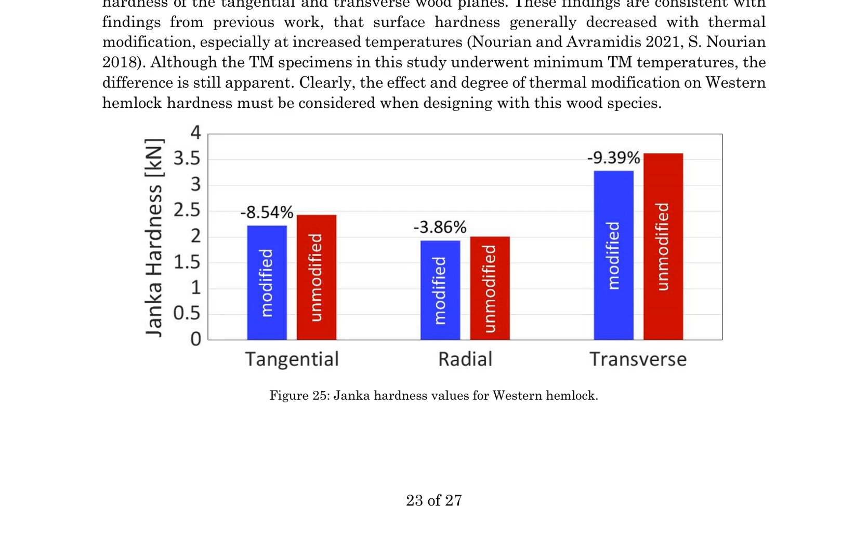The limitations of this study include the limited scope of thermal modification temperatures and the focus on a single wood species. However, the findings provide valuable insights into the effects of thermal modification on the mechanical properties of Western hemlock wood. This study explores the impact of thermal modification on the mechanical properties of Western hemlock, focusing on longitudinal and transverse flexure properties, fracture energy, and hardness.

The results indicate that thermal modification significantly influences the mechanical properties, particularly in the transverse direction. The Janka hardness values for unmodified and thermally modified (TM) Western hemlock are presented in Table 5. On the tangential face, the mean Janka hardness values for unmodified and TM Western hemlock are 2.43 kilonewtons and 2.22 kilonewtons, respectively, with coefficients of variation (COV) of 14.95% and 13.10%.

Similarly, on the radial face, the mean Janka hardness values are 2.01 kilonewtons and 1.93 kilonewtons, with COV of 17.55% and 14.50%. On the transverse face, the mean Janka hardness values are 3.62 kilonewtons and 3.28 kilonewtons, with COV of 9.79% and 13.44%. The conclusions drawn from this study are as follows.

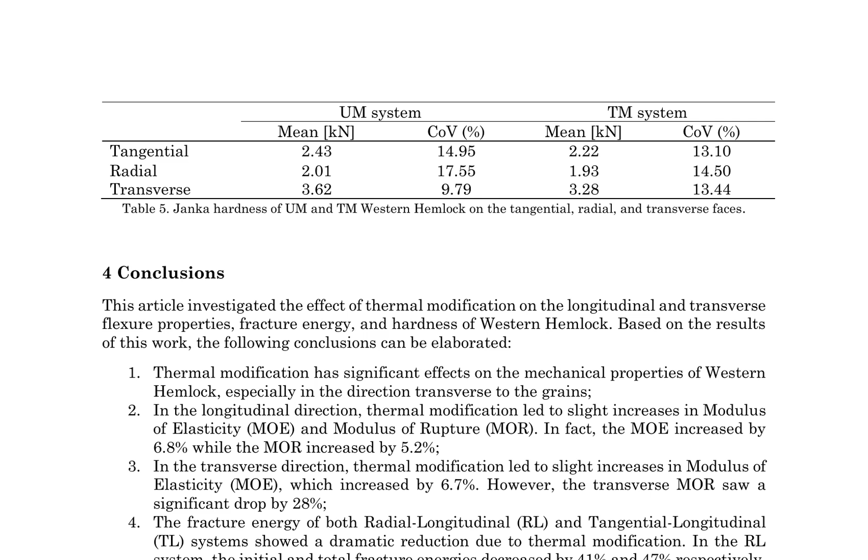First, thermal modification has significant effects on the mechanical properties of Western hemlock, particularly in the direction transverse to the grain. Second, in the longitudinal direction, thermal modification leads to slight increases in modulus of elasticity (MOE) and modulus of rupture (MOR), with increases of 6.8% and 5.2%, respectively.

Third, in the transverse direction, thermal modification leads to a slight increase in MOE of 6.7%, but a significant drop in MOR of 28%. Fourth, the fracture energy of both radial-longitudinal (RL) and tangential-longitudinal (TL) systems shows a dramatic reduction due to thermal modification, with decreases of 41% and 47% in the RL system, and 52% and 60% in the TL system.

Fifth, the Janka hardness values are reduced on average due to thermal modification, with statistically significant reductions on the tangential and transverse wood planes. These findings are crucial for the design of Western hemlock structures, as the reduction in fracture energy and Janka hardness induced by thermal modification must be taken into consideration. These properties are strongly correlated with the material's capacity to be damage-tolerant and dissipate energy upon crushing, which is also relevant to ballistic performance.

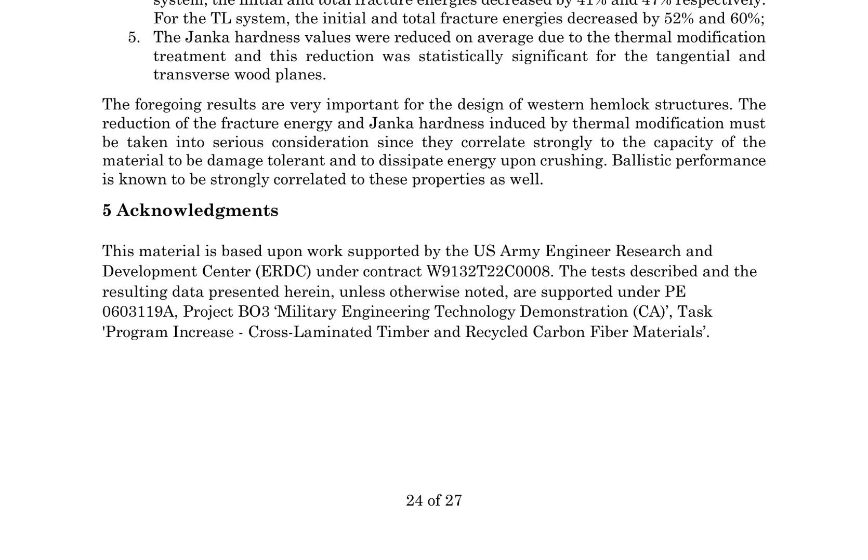Thermal modification of wood has garnered significant attention in recent years, driven by its potential as a sustainable and durable material for various applications. Understanding the interactions between moisture and the bending properties of thermally modified wood is crucial for structural purposes, as highlighted by Arnold's work in 2010.

The importance of standard test methods for small clear specimens of timber is underscored by the reference to ASTM D143. The theory of quasibrittle fracture mechanics and size effect, as presented by Bazant, Le, and Salviato in 2021, is essential for understanding the behavior of thermally modified wood under various loading conditions. The strength properties of thermally modified softwoods and their relation to polymeric structural wood constituents were investigated by Boonstra, Van Acker, and Tjeerdsma in 2007.

The thermal treatment process and its impact on wood properties were characterized and analyzed by Bourgeois and Guyonnet in 1988. The importance of structural stability in the context of wood modification is emphasized by Bazant and Cedolin's book on stability of structures, published in 1991.

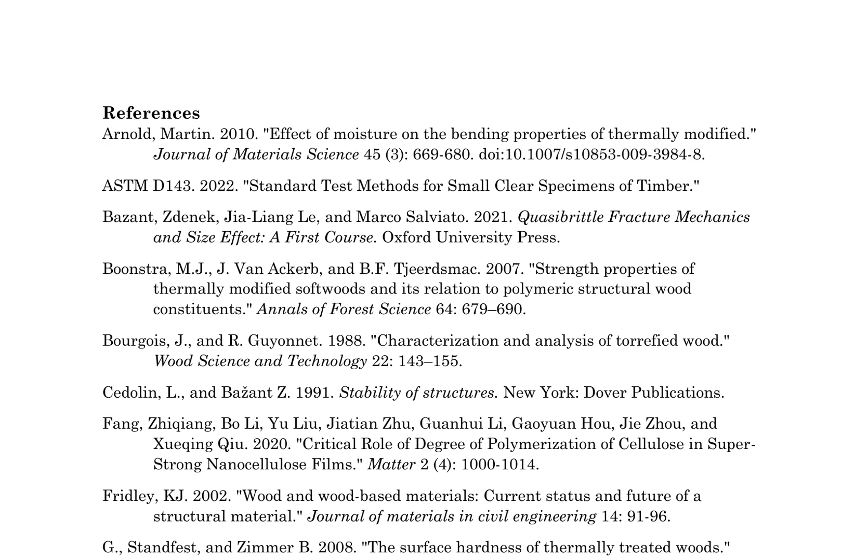The critical role of the degree of polymerization of cellulose in super-strong nanocellulose films was demonstrated by Fang et al. in 2020, highlighting the potential for nanocellulose as a high-performance material. Fridley's review in 2002 provided context for ongoing research in this field, discussing wood and wood-based materials, their current status, and future prospects as a structural material.

Standfest and Zimmer's study in 2008 demonstrated the improved durability and resistance of thermally modified wood, while Haku et al.'s investigation in 2006 emphasized the significance of thermal modification in enhancing wood durability. Hill, Altgen, and Rautkari's review in 2021 provided a comprehensive understanding of the thermal modification process and its effects on wood properties, focusing on chemical changes and hygroscopicity.

Hill's work in 1984 highlighted the general considerations for understanding wood stability under various conditions. Hu et al.'s research in 2020 demonstrated the potential for nanocellulose in enhancing the mechanical properties of composite materials. Ko et al.'s studies in 2019 emphasized the importance of thickness and platelet size in determining the performance of composite materials.

Overall, this comprehensive overview of the literature highlights the current state of knowledge in the field of thermal modification of wood, underscoring its potential as a sustainable and durable material for various applications.

A comprehensive review of studies on the thermal modification of wood reveals a multifaceted impact on its physical, mechanical, and fracture properties. Research has demonstrated that heat treatment alters wood's chemical composition, inducing significant changes in its behavior and performance. Studies have employed various heat treatment protocols, including kiln drying, vacuum drying, and superheated steam.